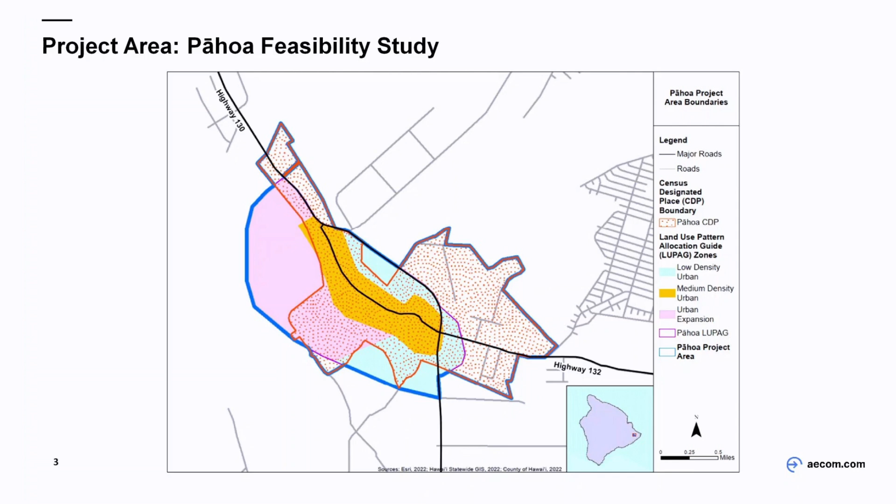It goes through 2052. The way we plan for wastewater is we project future populations and multiply by a per capita wastewater flow to estimate the overall flows for 2052. Pahoa is estimated to grow from 1,200 to 1,800 people and produce 0.154 million gallons per day of wastewater. Our study also assumed that the Pahoa project area would receive flows from Maku'u, the DHHL proposed development, which would add another 0.126 MGD in 2052. Summing these two, the total is about 0.3 MGD.

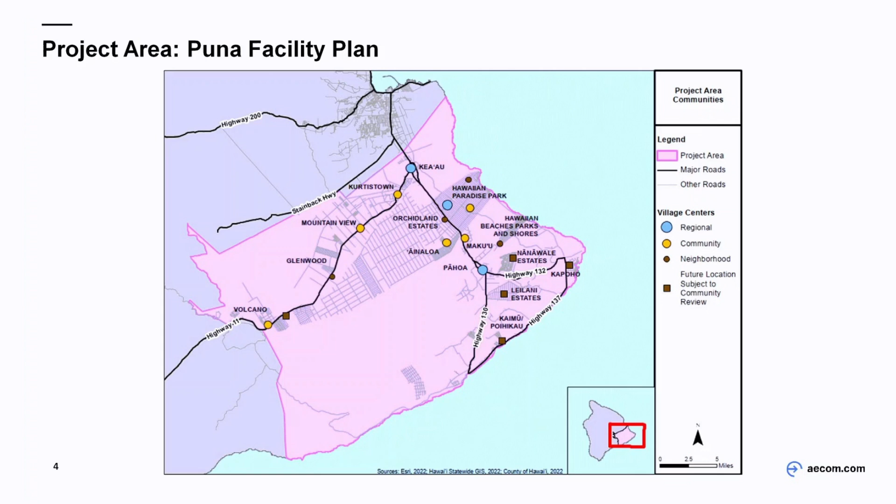Puna is estimated to grow to 80,000 people from 51,000. Applying the per capita wastewater flows, the projected flow is about 8.5 MGD. We have these detailed by census tract, which informs the planning of our treatment facilities. As far as collection, the conventional thing is gravity sewers, so you don't have to pump anything or use electricity. So wastewater collection is really dependent on elevation. If it can't be done by gravity, pump stations are necessary to convey the flows to the treatment plants.

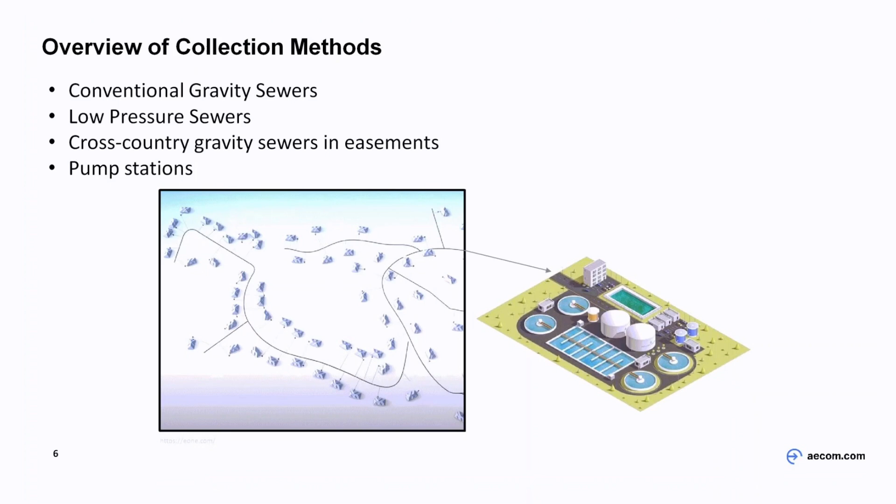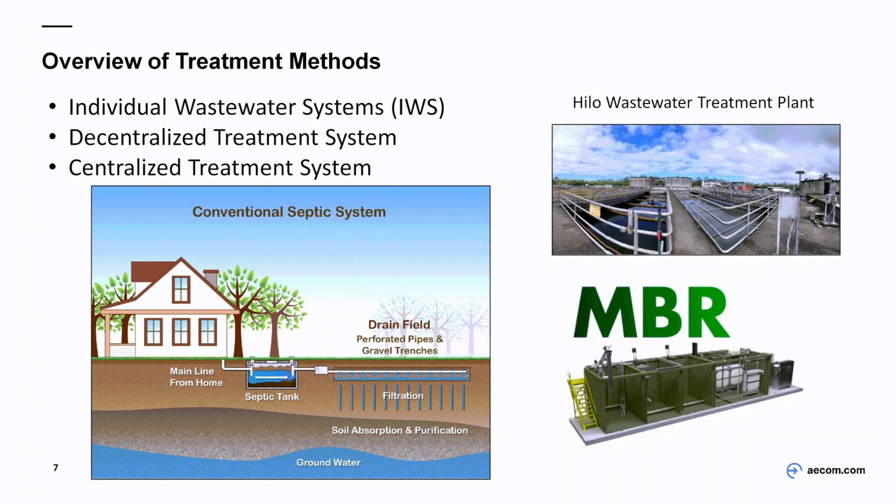We also looked at low pressure sewers to replace pump stations and sewer lines and found that to be a slightly cheaper alternative. We did look at all individual wastewater systems or decentralized systems. Decentralized systems would be package plants to treat the projected growth of commercial areas, schools, and hospitals. For treatment, packaged decentralized plants ranged in size from 15,000 to 250,000 GPD. We looked at centralized wastewater treatment plants of 300,000 GPD. We also looked at sending flows to the Hilo wastewater treatment plant.

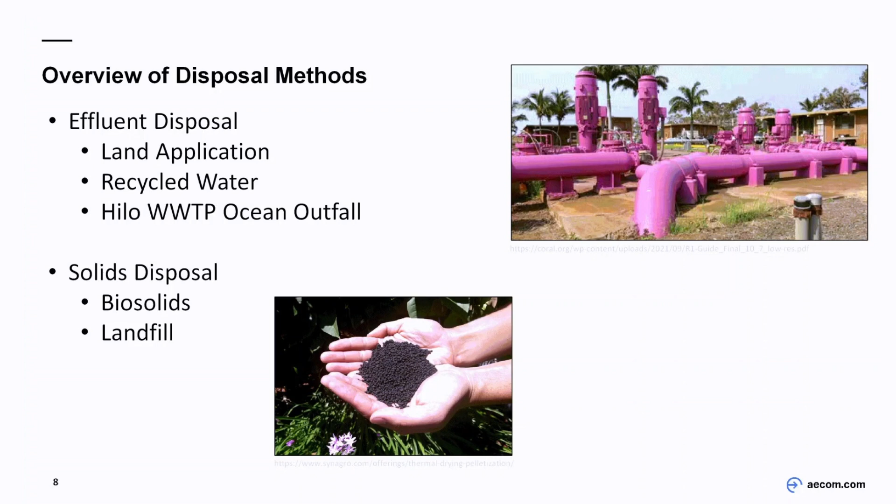We did look at disposal of both liquid effluent and solids, and looked at a lot of alternatives like land application, reuse of the effluent, solids disposal through biosolids, and to the landfill. The flows sent to Hilo would be discharged through the Hilo outfall after treatment. Here's the summary of the wastewater alternatives. The first page is the Puna wastewater alternatives.

What we have here are alternatives 1A and 1B, which are basically individual wastewater systems and decentralized treatment. Then alternatives 2, 3, 4, 5, 6, and 7 are all different numbers of treatment plants. For each one of those, we looked at 3 different collection system alternatives. Remember, I told you about the gravity and low pressure sewer and some kind of cross-country pipeline. So that's what these all are. And we use the term urban sewering, and I should probably point that out.

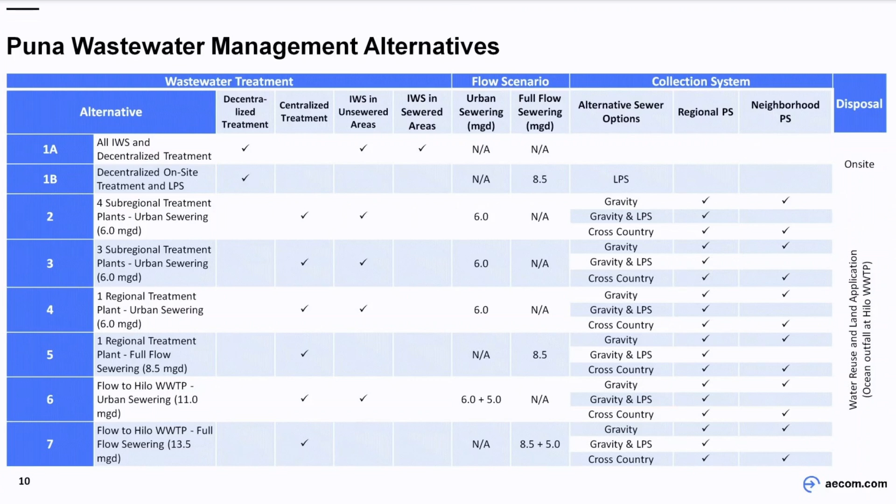If you look at alternative 2, urban sewering includes treating 6 MGD. Urban sewering is the zoned areas of lot sizes less than or equal to 1 acre, institutional uses like hospitals and schools, commercial and industrial. When you look at full flow, it goes up to 8.5 MGD, and all residences would be connected, so there would be no individual wastewater systems. And it would include larger zoned parcels.

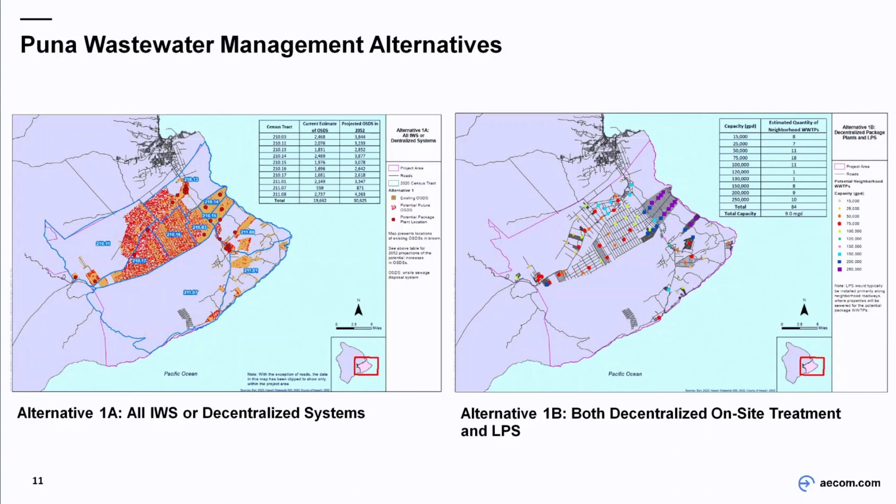Okay, so the next few pages are each of those alternatives. Alternative 1A was all individual wastewater systems, and for the growth in industrial, commercial, hospital, whatever, over the 30 years, we would plan decentralized treatment systems for that growth. Alternative 1B is both decentralized on-site treatment and low-pressure sewers.

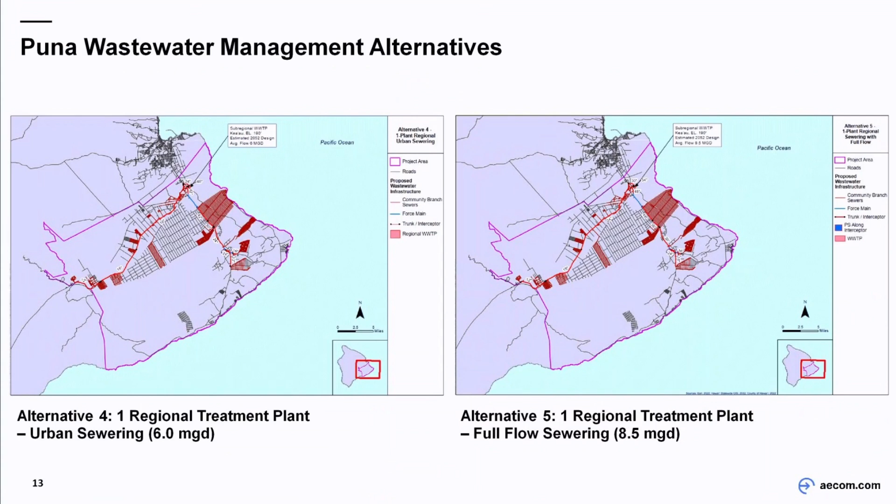Alternative 4 is 1 regional treatment plant in Keaau. These 2 alternatives, 4 and 5, are the 1 regional treatment plant with urban sewering and full flow sewering, so it jumps from 6 to 8.5 MGD. Alternatives 6 and 7 are sending the flows to the Hilo wastewater treatment plant. So it would send 6 MGD or 8.5 MGD all the way to Hilo.

Okay, so the next page is the Pahoa wastewater management alternatives. And for Pahoa, we just had 4 alternatives. And these are, again, all IWS, individual wastewater systems, and decentralized treatment for the commercial industrial growth, right? And we also looked at an alternative of decentralized on-site treatment with low-pressure sewer. We also looked at centralized treatment, and those are alternatives 2A and 2B.

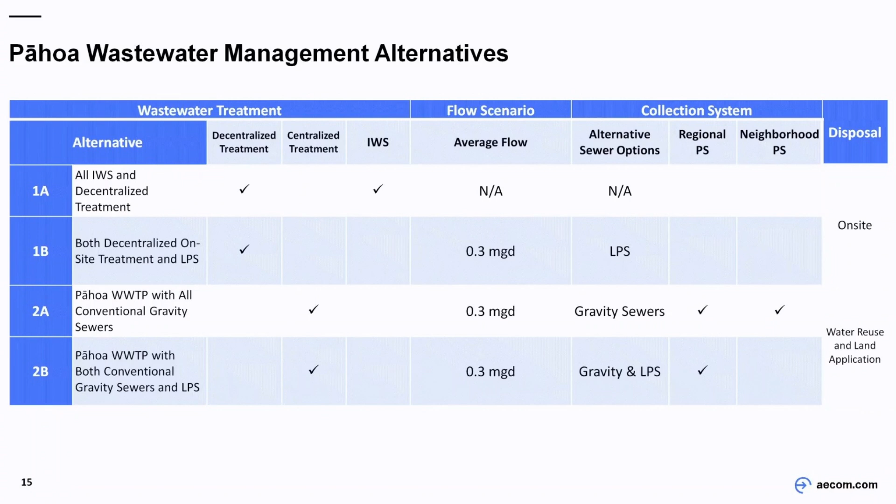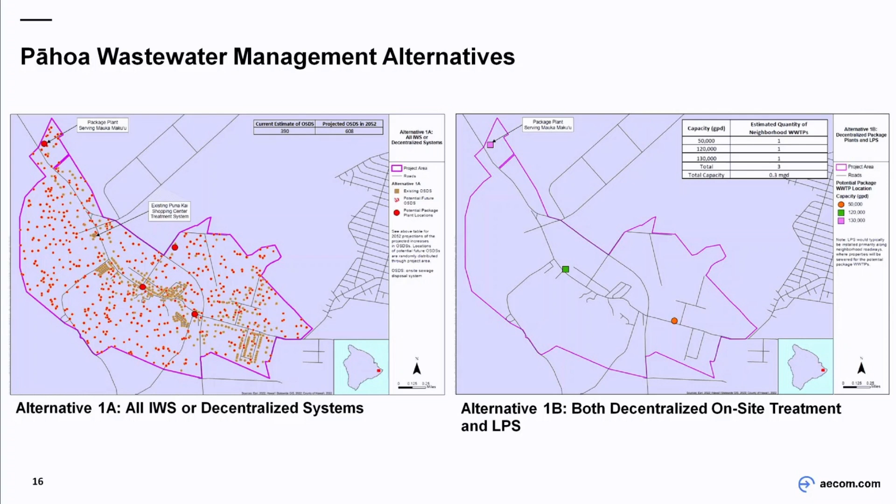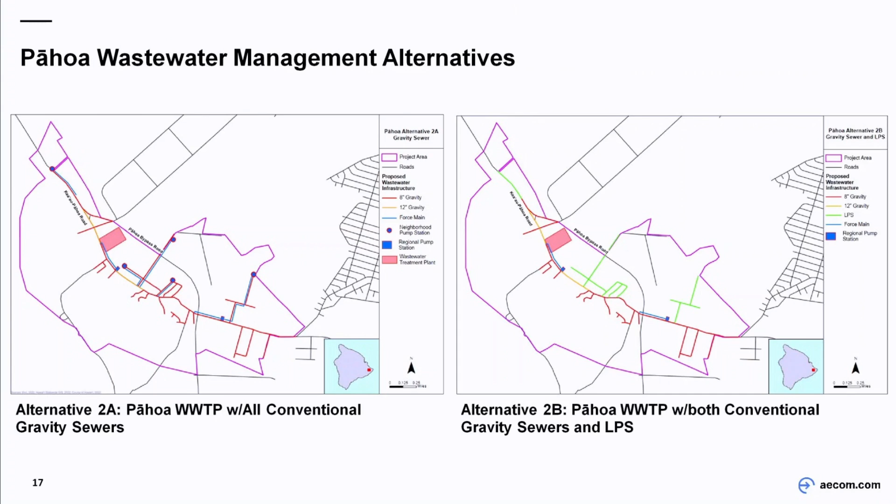So if you look at the pictures of the alternatives, the first one is all individual wastewater systems with a few decentralized treatment plants. Alternative 1B is decentralized 3 neighborhood plants. If you look at alternative 2A and 2B, it's 1 centralized treatment plant in Pahoa, and it's using conventional gravity sewers or a combination of conventional and low pressure sewers.

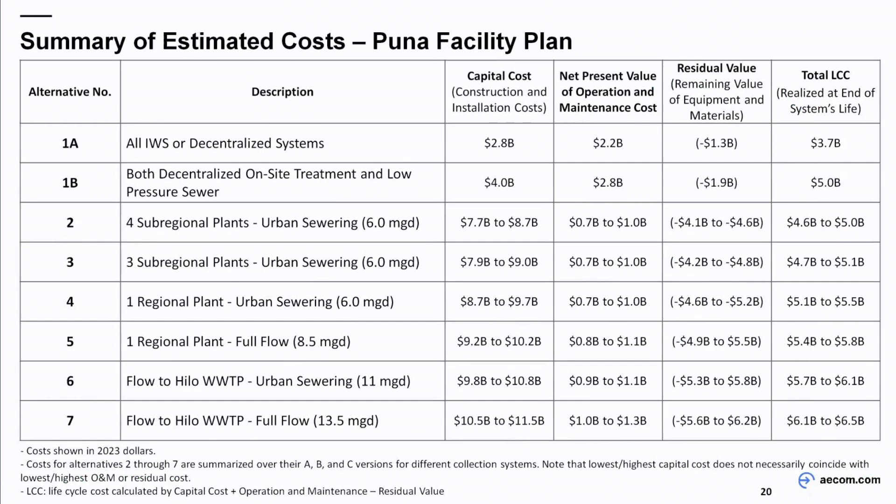Don't be shocked at the cost, but these are the ranges of costs for the alternatives. And there's a range because, for example, alternative 2 had 3 sub-alternatives, right, for the 3 different collection methods. So these are, yes, billions of dollars to come up with treatment systems for all of Puna. The next page is the summary of estimated costs for Pahoa's feasibility study, and those are ranging from 81 to 174 million.

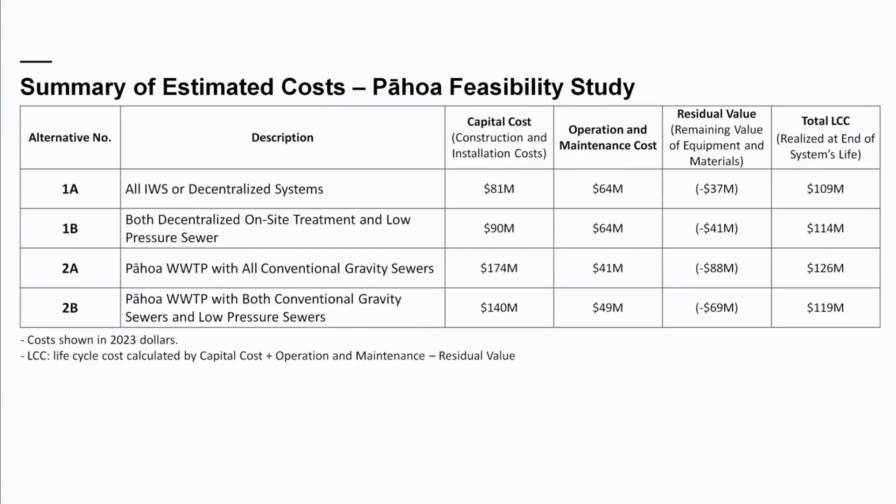Another point they brought up was about lava zones. Lava zones 1 and 2, and what is the county's position going to be about infrastructure in those zones? There would be no Pahoa alternative if we decided not to construct in lava zones 1 and 2. And if we decided not to construct in lava zones 1 and 2 for Puna, it basically lowers all of the alternatives by $2 billion.

Wow, this is going to cost a lot of money. For me, it really comes down to the affordability, right? Like, I know that there needs to be some kind of solution that's put forward because of the social and environmental impact. But the cost of living in Hawaii is so outrageous. And to factor in one more bill, we're pricing people out of paradise at this point.

What I'm looking at as far as evaluation areas that would drive me to want to do a project of this size would be high density areas, town centers that are evolving and growing. So you're starting to pipe to areas that are becoming town centers. That would be an evaluation piece in my mind. As well as current areas of concern.

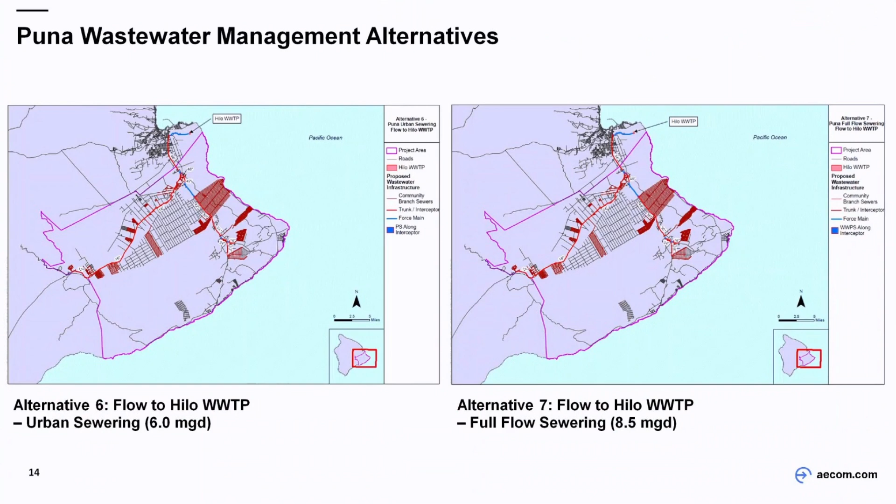You provided us the alternatives. 6 and 7 were urban sewering and full flow sewering. What's the difference between those two? So urban is just the denser, so less than or equal to 1 acre for residential and commercial, industrial, sort of like town areas. And full sewering is everybody. So largely the larger lots also are sewered with the 8 MGD. Okay. And that would all come back to Hilo, would be the plan for 6 and 7.

What is the capacity of the Hilo treatment facility? And where are they at right now? It would have to be improved. Currently, Hilo is permitted around 6 MGD, designed for a peak flow of 13.5 MGD. Currently, we've taken about 2.8 million gallons per day, so we're at half capacity. So the intent, if that option ever works, we need to add more components to expand the treatment. But it'll still be cheaper than building a whole facility.

And some of these alternatives put it all back in Keaukaha. And I got a community who's over it. They're done carrying everybody's waste. And so when I look at your evaluation criteria and the alternatives, absolutely, I think what's missing in some of this is the historical carrying capacity of a community who's done doing it already. Yeah. We're absolutely done.